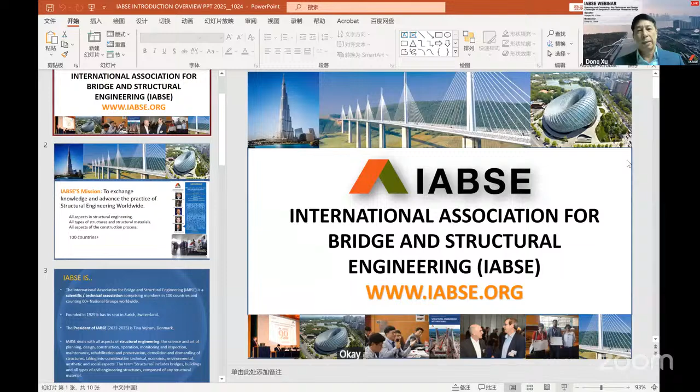The full name of IABSE is International Association for Bridge and Structural Engineering. Its mission is to exchange knowledge and advance the practice of structural engineering worldwide. It has members over 100 countries, with national members and individual members.

IABSE is a scientific technical association comprising members in 100 countries and more than 60 national groups worldwide. It was founded in 1929 and has its seat in Zurich, Switzerland.

The current president of IABSE is Tina Vejrum from Denmark, and the president elect is Harsha from India. IABSE deals with all aspects of structural engineering.

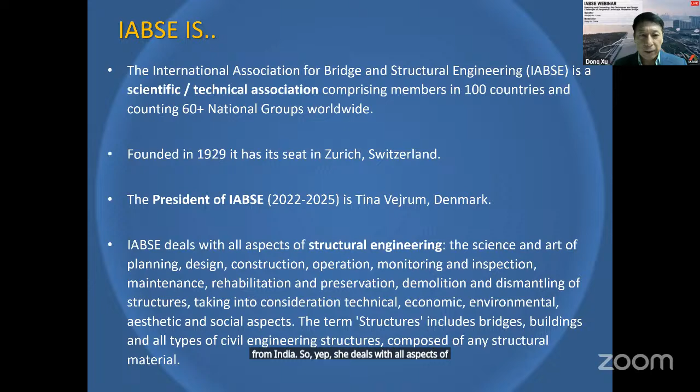The objective is to promote cooperation and understanding among all those concerned with structural engineering and related fields by worldwide exchange of knowledge and experience, to encourage awareness and responsibility of structural engineers towards societal needs, to encourage actions necessary for progress in structural engineering, and to improve and foster cooperation between organizations having similar objectives. For this purpose, the association organizes conferences.

It has two conferences every year: a congress in autumn and a symposium in spring. It publishes the high quality journal SEI, the Structural Engineering International, and books reflecting the work of technical groups we call SEDs. It creates technical groups as needed by new technology progress, offers opportunities to join activities within national groups, offers a program for young engineers, and presents annual awards.

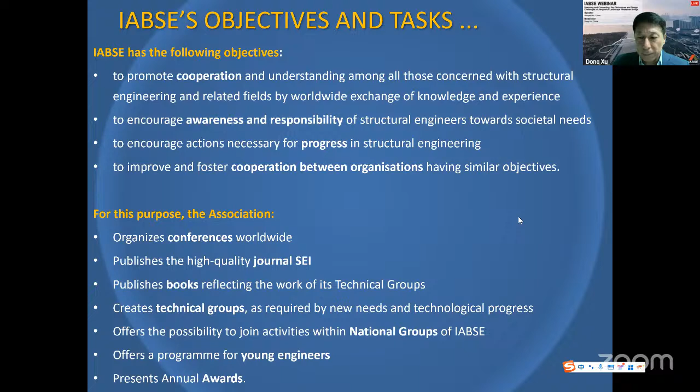This is an example of activities. This year's Congress was in Ghent, Belgium, and next year's symposium will be in Copenhagen, Denmark.

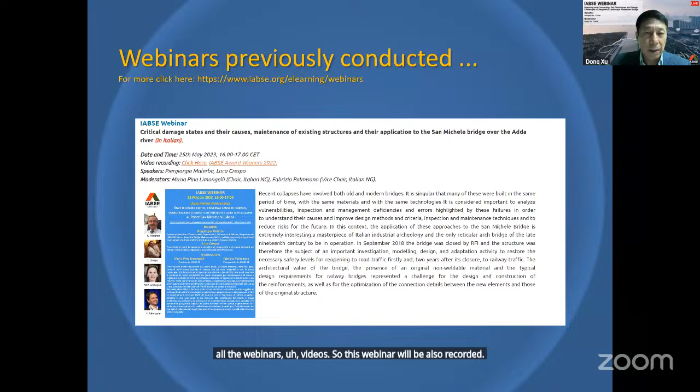IABSE has awards: the IABSE People and Paper Awards, and awards for projects and technology. Today's webinar bridge is a finalist of pedestrian and cycle bridges this year. The winner will be announced next month in Zurich, Switzerland.

My presentation includes four parts. The first is project overview, including the bridge location, architecture concept, and some information about the challenges we faced designing this bridge.

The second part is the bridge structure scheme, including mechanism and composition and some parameter comparisons we did.

The third part is specialized design, including the wind tunnel test, pedestrian comfort analysis and test, seismic design, and some detailed design. The last part is about the construction process and some site photos.

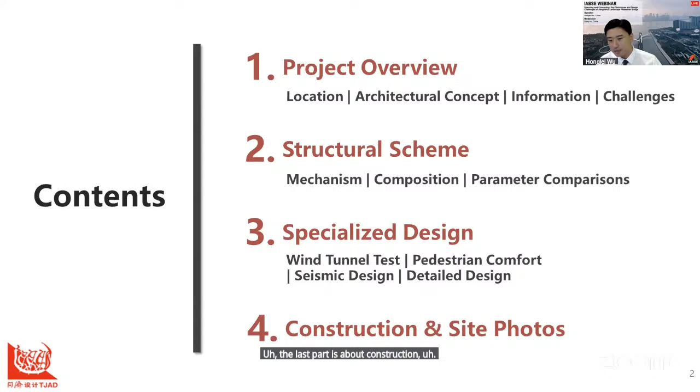This is a site picture of Jianghehui Bridge. This bridge is located in Hangzhou, China. The architecture design of this bridge is by Zaha Hadid Architects, and the structure concept design is by Arup. We are the Tongji Architecture Design Institute, the local design institute department, and we carried out all of this bridge's design and construction review.

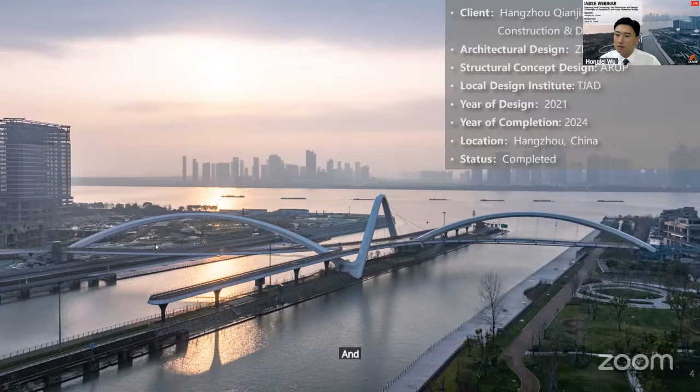This bridge was designed in 2021 and finished in 2024. You can see this picture. Along this bridge there is a very large river, the Qianjiang River, about 600 meters wide. And this small canal is the Jinghang Grand Canal, very famous in Chinese history.

But now this Grand Canal is on the World Heritage list. This bridge is in a very unique and important position, so it has some meaning about the history between modern and old times. Also, this canal still has an important function for busy shipping today.

Also in Hangzhou, this bridge will become a landmark. In the old time, Hangzhou was known for West Lake. Now, it will transfer to the Qianjiang New Era. So this bridge is a very important landmark in this place.

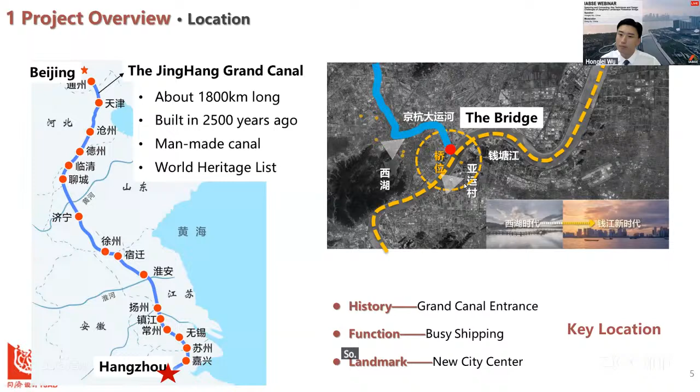The architecture group Zaha is a very talented design group. They designed a very important aim for this bridge, calling it 'threading the needle,' which means seamless connection to the city. It has two meanings, including seamless history, meaning the bridge connects the old time and the modern time.

Also, this bridge has a very important function called the seamless city. This bridge spans three disconnected shores and connects to five urban districts, giving it a very important function to this place.

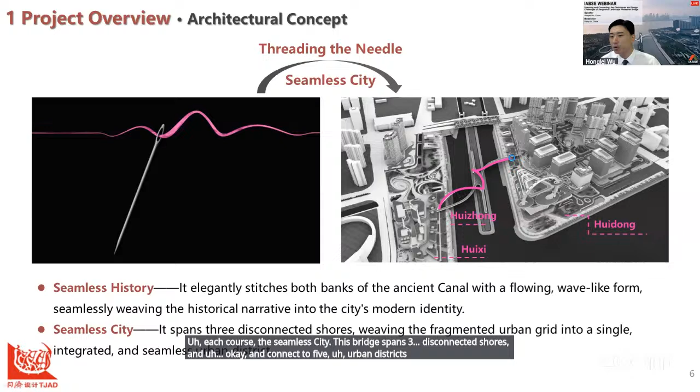Because the architecture is from the Zaha design group, they like to use a very unique and curved shape geometry in this bridge. So the bridge geometry is also very complicated.

It has three bridges continuous with each other, including the West Arch, which is 145 meters long, the Middle Arch, which is 79 meters, and the Eastern Arch, which is 156 meters long.

All the decks connect with each bridge. You can see from the west to the east, the deck connects to each arch. So the deck helps to bear conflicting forces.

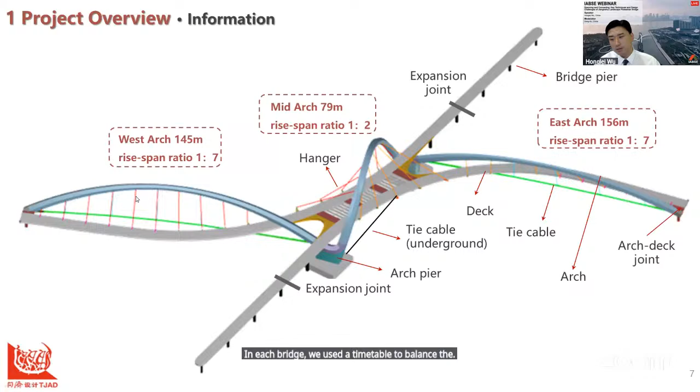Also, because this bridge is near the shore, the foundation is not very good. So we had to design this bridge using a self-balance system. At each bridge, we used a tie cable to balance the arch thrust.

When we designed this bridge we faced many challenges at the system level, such as the arch. This arch is inclined, and the three arches are continuous but not in one plane. The support is also complicated, an asymmetric boundary, and because the bridge height is strictly limited, this bridge has a small rise-to-span ratio.

The deck is very wide, up to 6 meters, with many functions including walking, cycling, and marathon use. Also, for a better side view, this deck uses single-side suspension.

Because of this complex geometry, the structure's components are also complex, including irregular earplates, twisted arch piers, and the arch-deck joint.

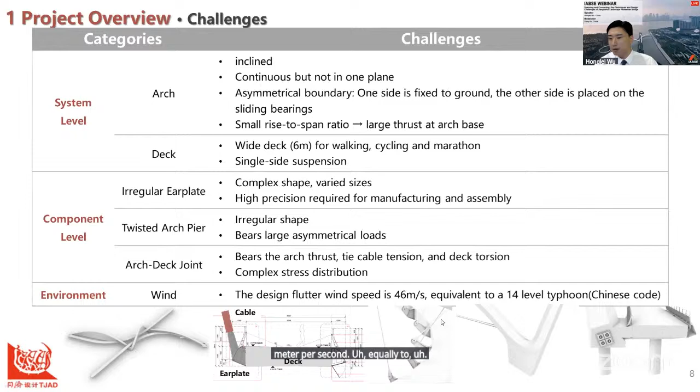This is some more detail about this bridge. You can see the three arches are continuous but not in one plane, so every two bridges create a very large unbalanced force in the arch pier.

Because the top of this bridge is limited, the rise-to-span ratio is small, so the side arch is a shallow arch, leading to a very large thrust. For the boundary, it's asymmetrical: one side is fixed to the ground, and the other side is placed on a sliding bearing. So we use this tie cable to balance the arched thrust.

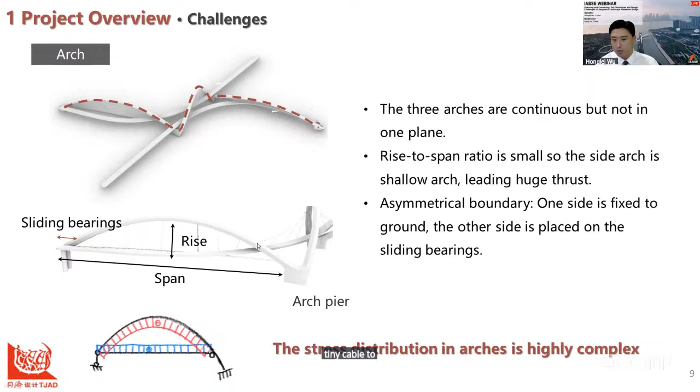This bridge deck is very special because it has many requirements, like marathon events and cycling use. So the width of this deck is up to 6 meters. Also, for a better side view, this deck is single-side suspension, so people in this place can see the Qianjiang River.

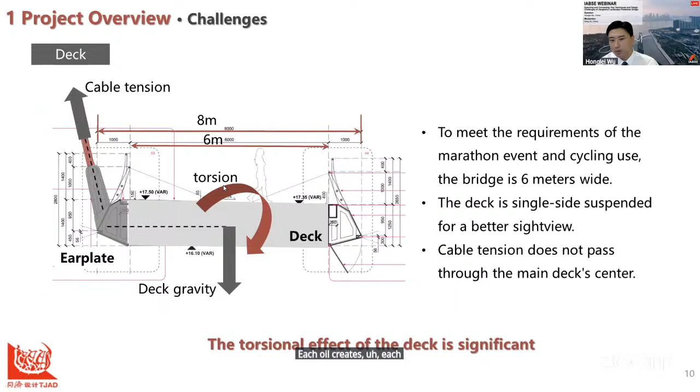Because this cable tension to these earplates does not pass through the deck center, under gravity it creates a very large torsion in the deck.

Also, because of the complex shape, every earplate is a different size, different angle, and has different forces. Also, the architecture has strict requests for manufacturing, so high-precision data is needed for these earplates. We provide this data to the manufacturers and construction group to make these earplates.

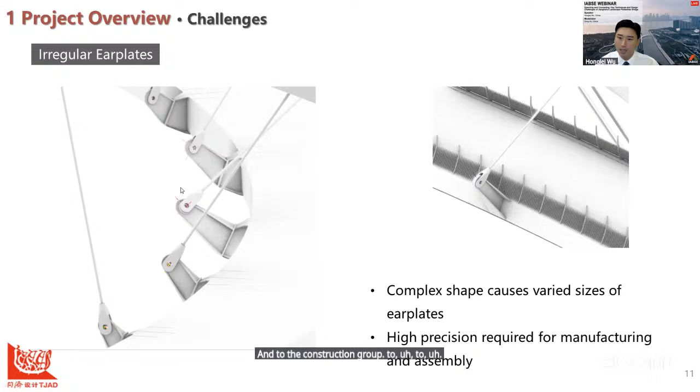This is a twisted arch pier. Each arch pier has to bear two arch thrusts and cable tension. Because the two arches are not in one plane, there is a very large torsion in the arch pier.

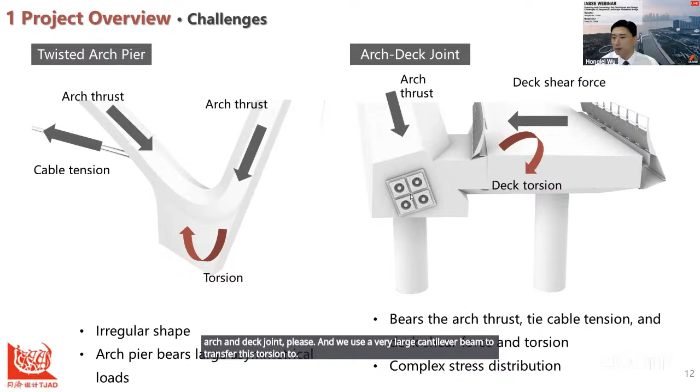At the same time, at the end of the bridge, at the arch-deck joint, the deck transfers a very large torsion to this joint. We use a very large cantilever beam to transfer this torsion to the supports.

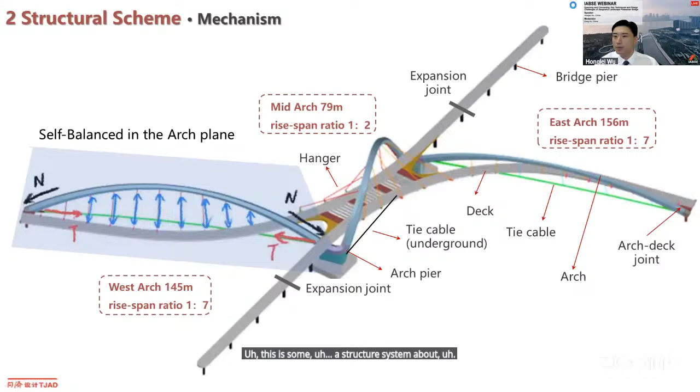This is some structure system about mechanisms. For example, we use one west arch, as you can see, under the gravity.

This arch is self-balanced in the arch plane. The gravity load will transfer from the deck by the hanger cable to the arch, and the arch will transfer to the big thrusts at the end, and we use tie cable to balance this thrust from the arch. So the foundation's force will be largely reduced. Horizontal force is only just a vertical load for the foundation.

And we do many comparisons and many calculations about the arch inclined angle, arch section, and weight to make sure the combined force of the arch weight, self-gravity, and the suspension force from the deck align in the arch plane.

So the arch, although this arch is inclined, the forces in the arch are mainly axial force, and because we have tie cable, we can balance this thrust. Therefore, all the force in the arch is in one plane.

For the deck, the vertical component of the hanger force will balance the deck weight gravity. But because this force will not go through the deck center, there will be a very large torsion. For the horizontal components, the force will be balanced by the shear and axial force in the deck and transfers to the end of this bridge, and on this side it will transfer to the other bridge, and go into the third arch end for this deck force.

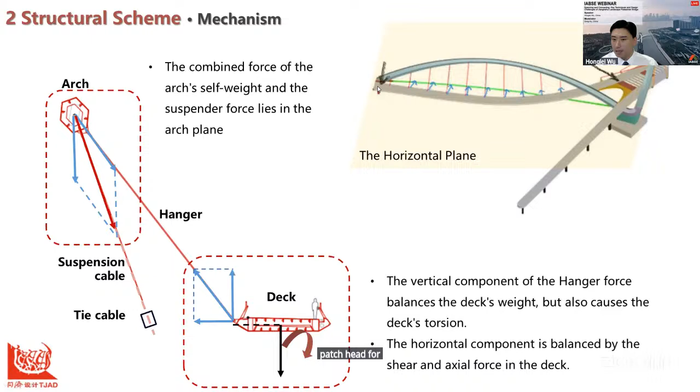This is some detailed design about the members of this bridge. You can see for the arch member at the foot, the arch member will be up to 4.3 meters high and 4 meters wide. We use a hexagonal shaped member, and at the top of the arch the member will be smaller, about 2.8 meters high and 2.6 meters wide.

The arch member is very complex because we have to anchor two cables. This large one is the hanger cable to support and hang the deck, and the small cable is the suspension cable we use to hang the tie cable.

The thickness of this arch member is about 40 millimeters at the foot and 32 millimeters at the arch top. The material we use is steel, about Q420qD.

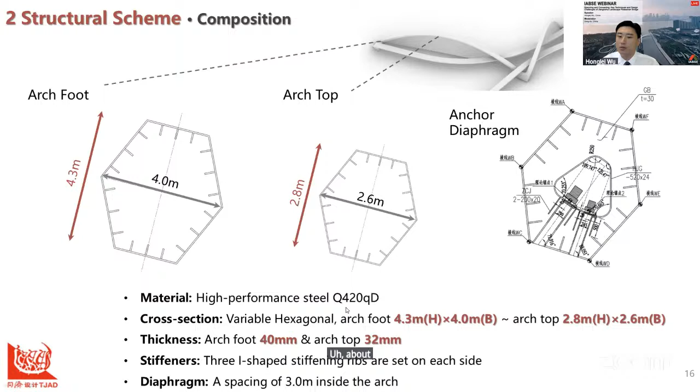In this bridge we have three types of cables. The first one we call the tie cables, which are at the back of this bridge, used for balancing the arch thrust. Each arch has four tie cables. Each tie cable's diameter is 140 millimeters. There is about 7,000 kilonewton force in each tie cable.

The second cable we call the suspension cable. This one is for hanging the tie cable. Its diameter is small, only 60 millimeters. It will have about 1,200 kilonewton in each suspension cable.

The third type of cable we call hanger. It's used for hanging the deck, and there are two diameters: the small one is 80 millimeters, the large one is 100 millimeters, and the force is about 3,000 kilonewton.

For the deck material, we also use high-performance steel Q420, and the cross-section of the deck is about 6 meters wide and 1.37 meters high at the end, and at the top is 1.29 meters. The thickness of this deck varies from 16 millimeters to 24 millimeters.

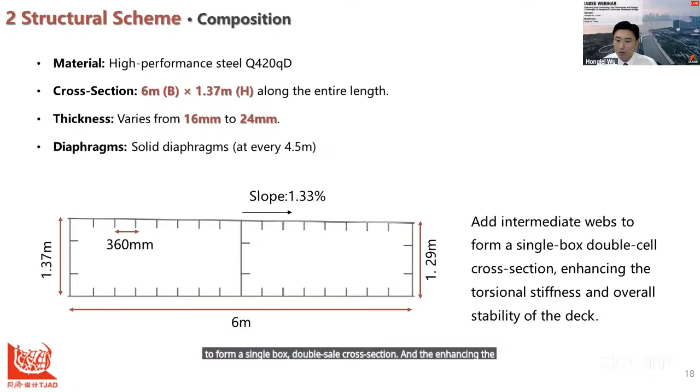We add intermediate webs to form a single box double cell cross section, enhancing the torsional stiffness and overall stability of the deck.

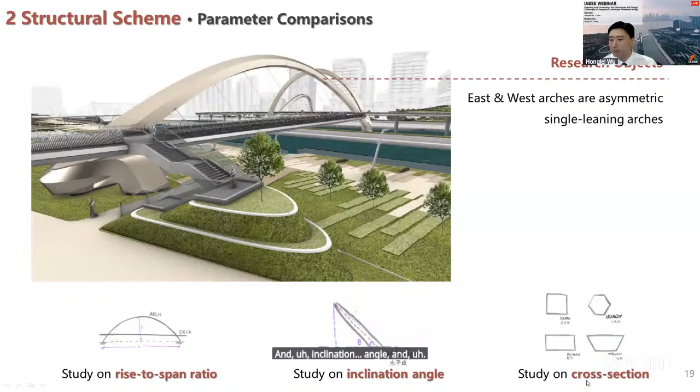And we compare some parameters between these five bridges. From the arch span, we can see Jianghehui Bridge is very long, up to 150 meters, and the deck width is also very big, only less than the Gateshead Bridge.

For the rise-to-span ratio, the other four bridges are about 1 to 3, but in our bridge it's up to 1 to 7, which means we will have a very large arch thrust. We also compare the inclination angle, because our bridge is large and heavy, so the inclination angle can't be very small. So our bridge is more strict than other bridges.

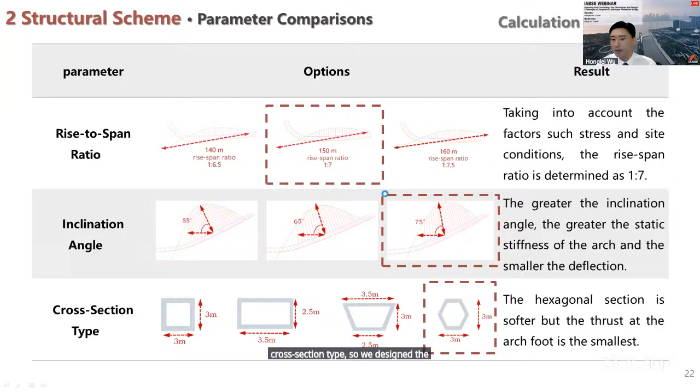For the cross-section type, because the architecture wants our bridge to be unique, we use a hexagonal section, which is a six-sided section. We compare different parameters like span, incline angle, and cross section type. So we design the final parameters for this bridge.

Because this footbridge is large and near the big river, the wind load is strong, so we did some wind tunnel tests in Tongji University, comparing different wind situations such as uniform flow field and turbulent flow field. This model is 1 to 49 full bridge scale.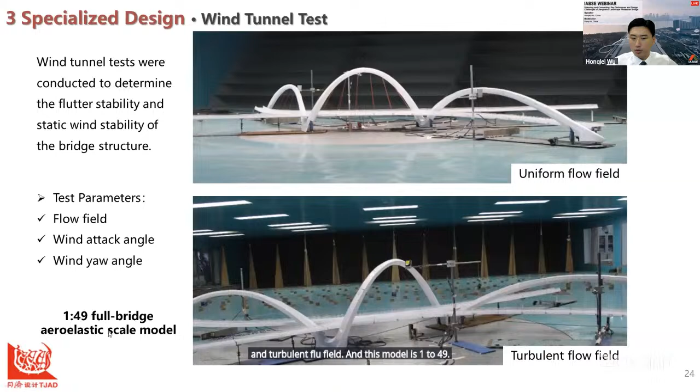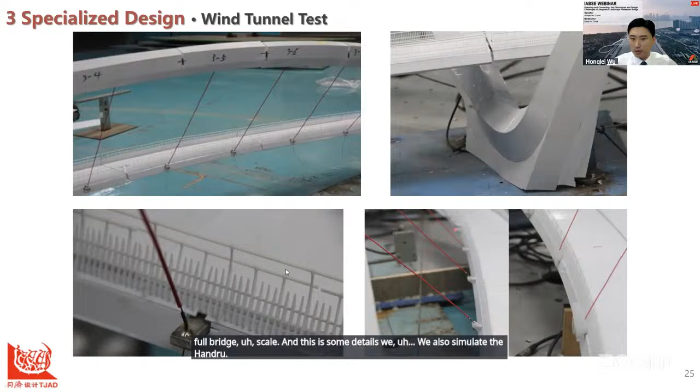According to the wind tunnel test, for our bridge, the critical flutter wind speed under all test conditions in both turbulent and uniform flow fields was greater than 77 meters per second, which is about level 17 typhoon. In our code, we just have to satisfy level 14 typhoon, which is about 46 meters per second.

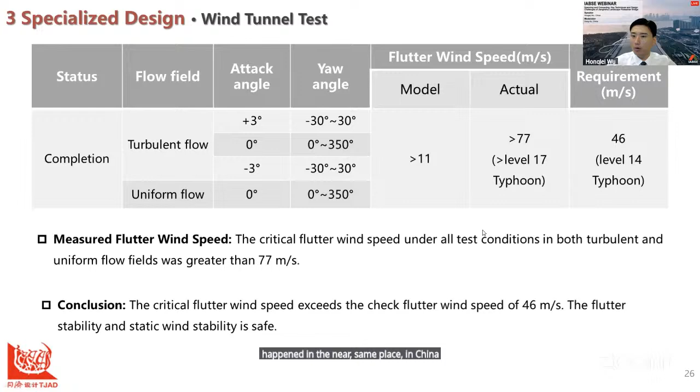But as you know, recently many larger typhoons happened near the same place in China. So we have to make our bridge stronger.

Regarding the comfort of this bridge, according to a Germany standard, there are mainly two sensitive frequencies about vertical vibration. The smaller one is 1.25 hertz.

We calculated our bridge. There is an 11th mode shape, and the vibration of the west bridge, west arch and deck has a frequency of 1.5 hertz.

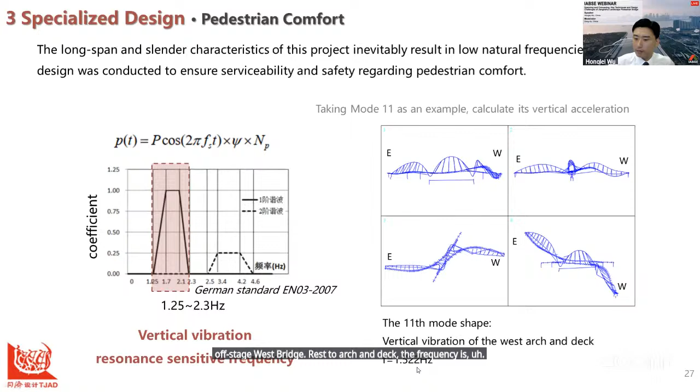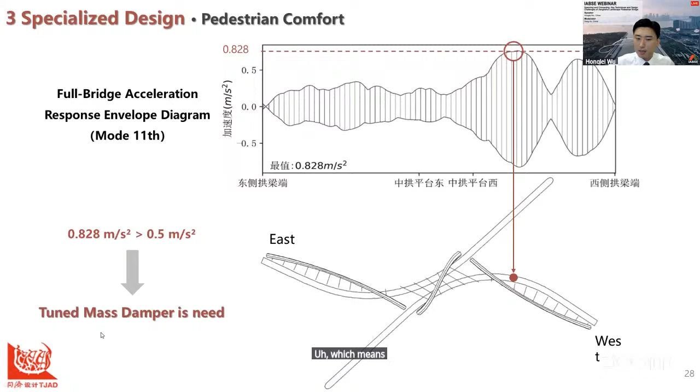So we calculated the acceleration response of this model, and we can see the vertical acceleration exceeds the code limit, which means a tuned mass damper is needed in this bridge.

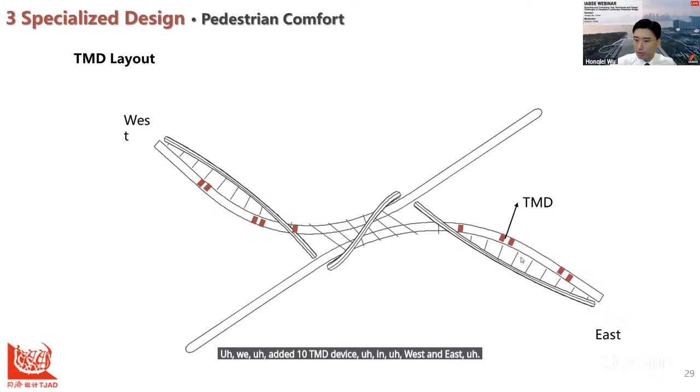We added 10 TMD devices in the west and east bridge to reduce the vibration. After putting the TMD devices in this bridge, the acceleration decreased by up to 1 to 10 compared to before.

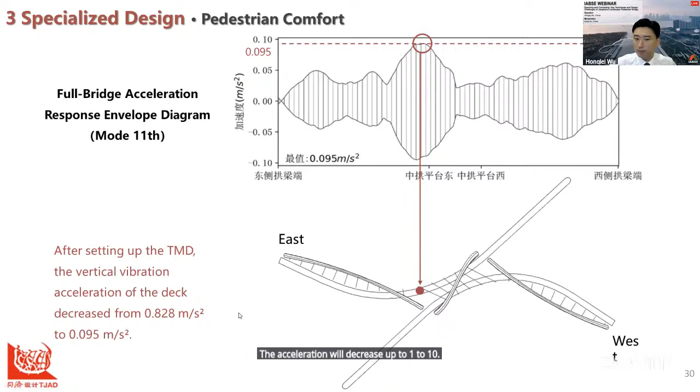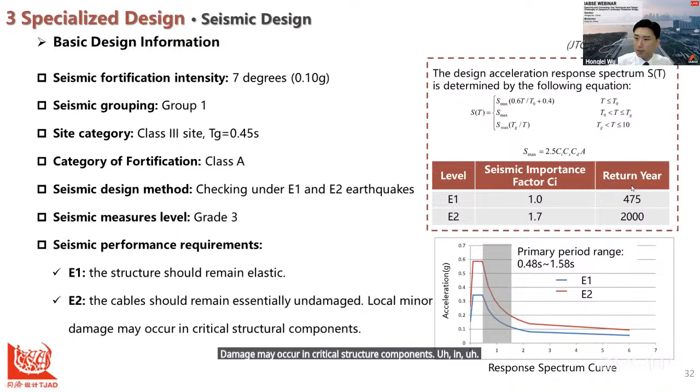For the seismic design in Chinese code, we have to face two seismic requirements: E1 level, which means the structure should remain elastic under a 475-year return period earthquake action; and E2 level, in which the cables should remain essentially undamaged, with local minor damage allowed in critical structure components under a 2000-year return period earthquake action.

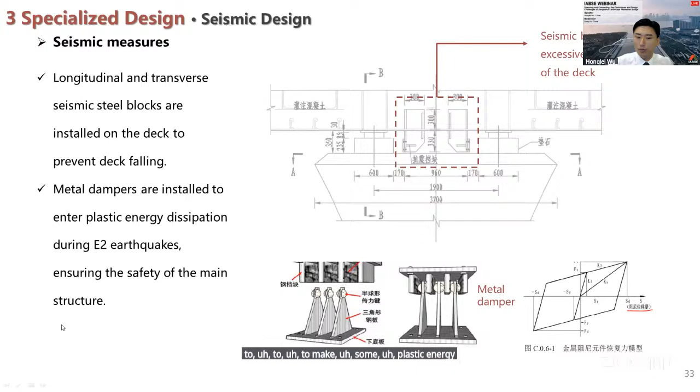We put some steel blocks along the longitudinal and transverse directions of this bridge to prevent the deck from falling. We also put some metal dampers in the bridge to achieve plastic energy dissipation during E2 earthquakes.

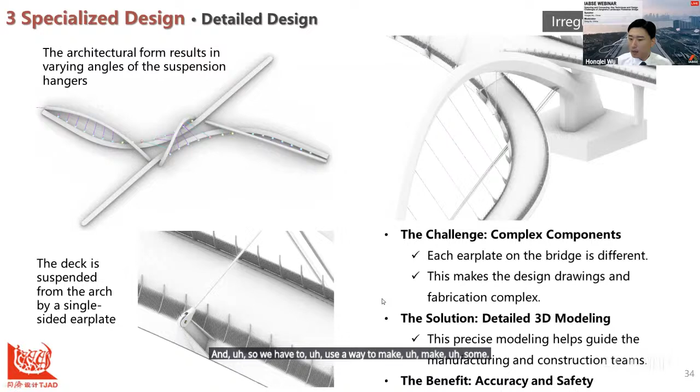For the ear plates, as I said before, the geometry is very complicated, so we had to find a way to make accurate and safe ear plates. We used Rhino and Grasshopper software to confirm each ear plate.

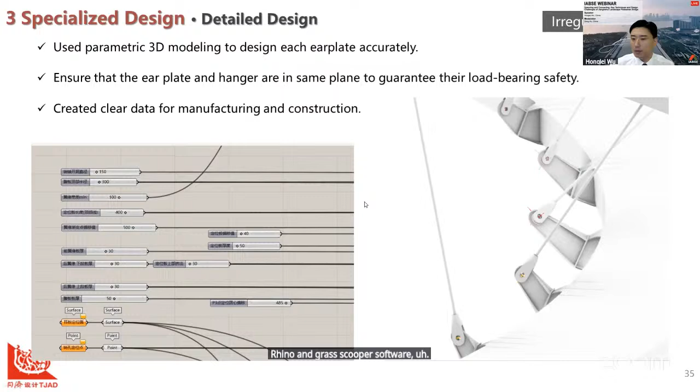There are three types of ear plates. The simplest one, the small ear plates, has only axial tension force. For some tall ear plates, there is tension and bending, so we use continuous tension flange in these planes, while the compression flange is welded.

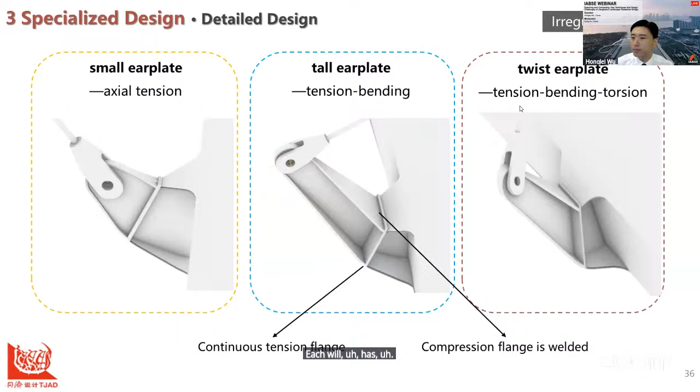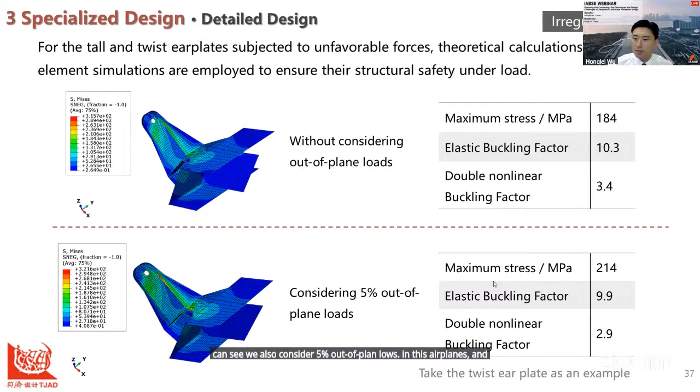The complex one we call twisted ear plates. It has tension, bending, and torsion. We calculated all of the ear plates, considering 5% out-of-plane loads, and the maximum stress is about 200 MPa.

Because the architectural form gives the arch pier section spatially continuous and twisted ear plate pairings, the force in this arch pier is very complicated, including arch compression and cable tension, which creates very large torsion in the arch pier.

So we set many internal diaphragms and stiffeners in the arch piers to ensure the safety of the arch wall panels under combined stress conditions, and on the other hand, to ensure the reliable transmission of the tie tension.

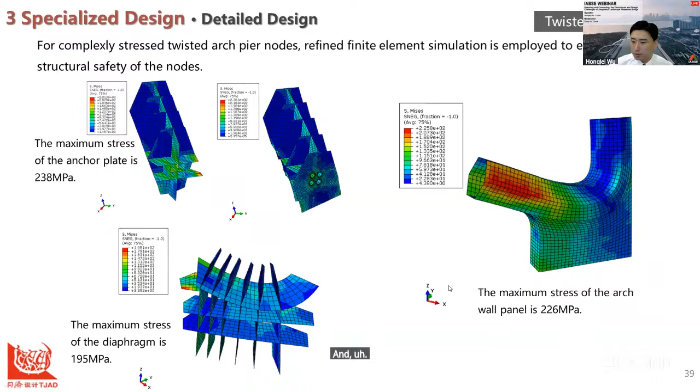We also calculated the different load conditions for this structure, and the steel stress is about 226 MPa. For the arch-deck joint, the arch foot is also a very critical part of the entire bridge, requiring coordinated work between the arch force and the deck.

Because the deck torsion will be transferred to the arch member and to the support, we considered how to manage this transfer carefully.

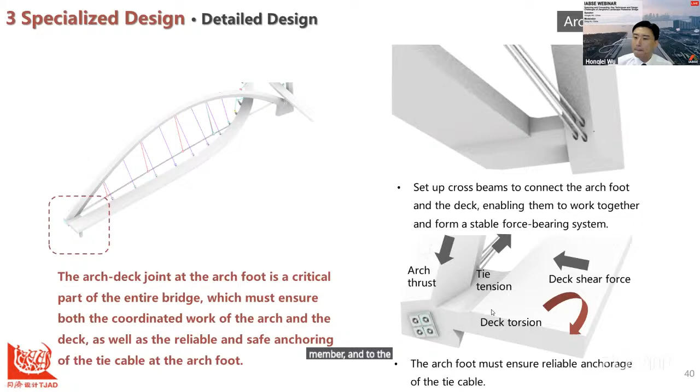We also used many anchor diaphragms in the arch member to transfer the tie cable's force, and we used three cross beams to transfer the deck torsion force to the arch.

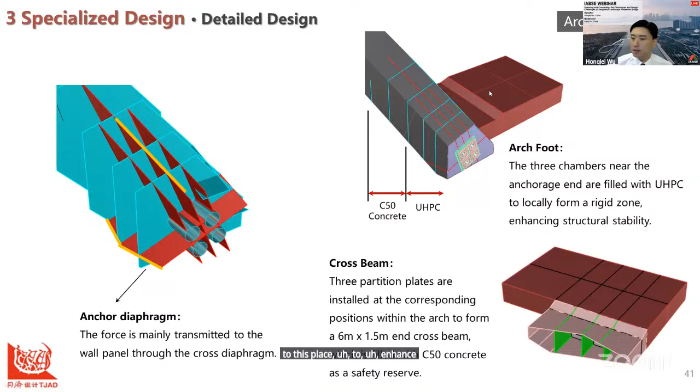We used UHPC material in this location to enhance structural stability. This is some of the calculation work.

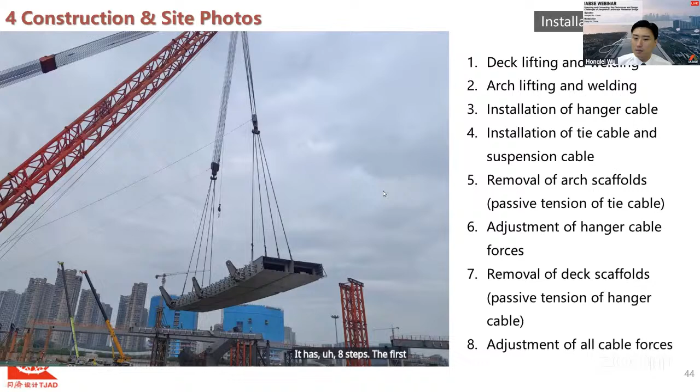The last part is construction and site photos. This is the bridge installation process. It has 8 steps. The first one is deck lifting and welding. This is the deck.

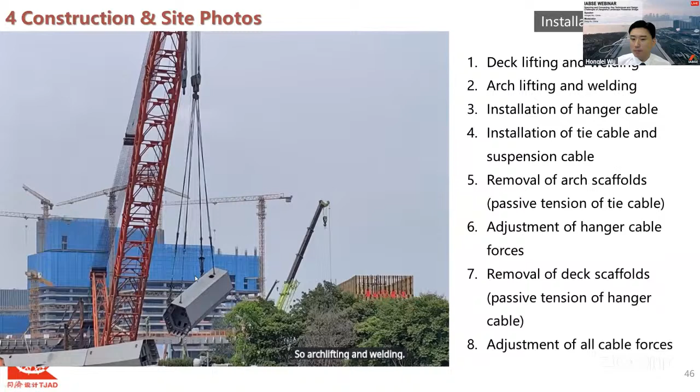The second process is the arch lifting and welding, and this is the arch being lifted.

The third step is to install the hanger cables between the arch and the deck, and the fourth is to install the tie cable and the suspension cable of each arch.

And next, we removed the arch scaffolds. At this place, this tie cable will have passive tension.

Next, adjustment of the hanger cable. We make some force in this hanger cable, and next we remove the deck scaffold.

At this time, we will create some more passive tension in the hanger cable and in tie cables. At last, we adjust all the cable force, mainly the hanger cable, to make each cable's force more even.

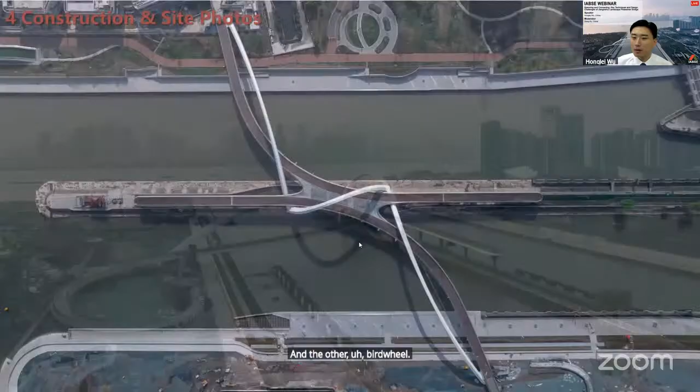This is the finished bridge, and the other bird view, and from the top view, and from the human view. Okay, that's all for my presentation. Thank you.

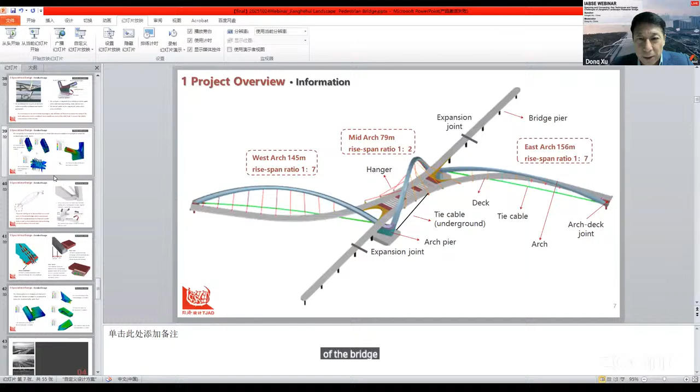What kind of foundation? Piles? Yes, yes, this foundation is very typical. It's just the pile foundation, because most of the torsion and shear force is transferred by the raft, not transferred by the piles. Only the vertical force is transferred by the pile foundation.

So there are no inclined piles, only vertical piles? Yes, yes, yes. Okay, okay.

So the suspension cable can take the thrust of the east and west arches, and the underground tie can take the thrust of the mid arch. Am I right? Yes, okay. So you don't need any inclined piles to take the horizontal forces?

Yes, because the canal government administration has very strict, very high requirements. They don't allow us to make any pile inclined to go into the canal. So we were only allowed to transfer the vertical force in the foundation.

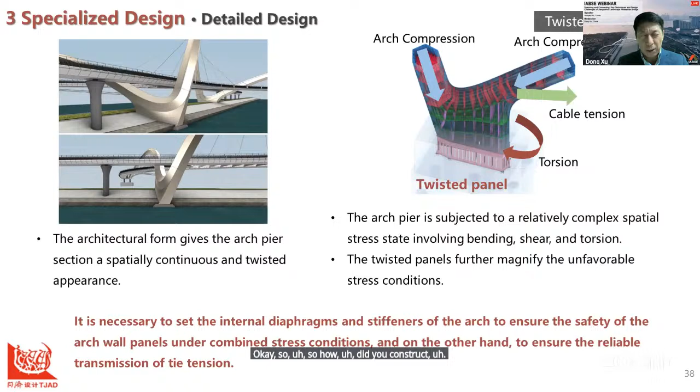Okay, okay. So how did you construct this on site? How did you build the horizontal ties? That means the underground ties for the mid arch.

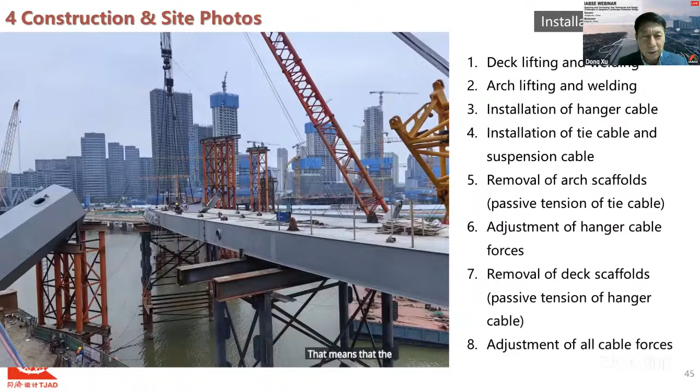In the middle arch, actually they don't have many horizontal forces, because we put the tie cable on the ground to balance the horizontal force. And for each side large arch, we used tie cables. So there were not many large horizontal forces in these two bridge spans.

Okay. So, do you have any lighting design for this bridge? Yes, we have, but the picture is not very beautiful, so I didn't put it in. Do you have any materials to show us?

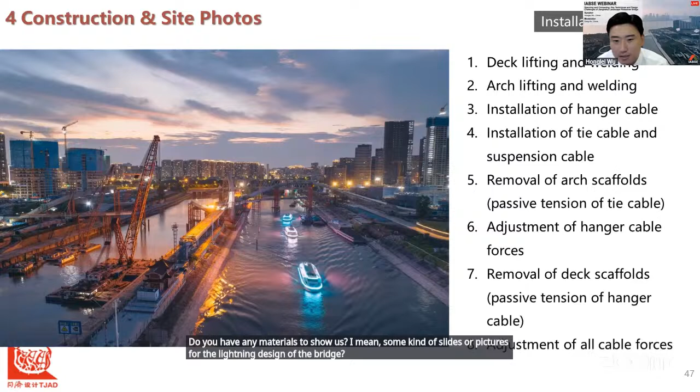Sorry, I mean some kind of slides or pictures for the lighting design of the bridge in the evening. Yes, I don't have the picture, so sorry. Okay.

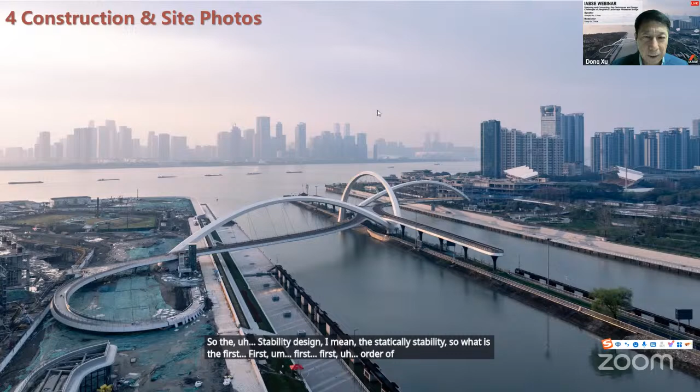Let's check if we have any questions from the audience. So, the stability design—I mean the static stability—what is the first order buckling mode for the bridge? Okay, the first buckling mode of this bridge is out-of-plane deformation.

Okay, yes. The mid, the large arch, the west arch—yes, the west arch. The first buckling mode is out-of-plane deformation. Okay.

So what is the cost of the bridge? About... sorry, it's about 880 million RMB. Okay.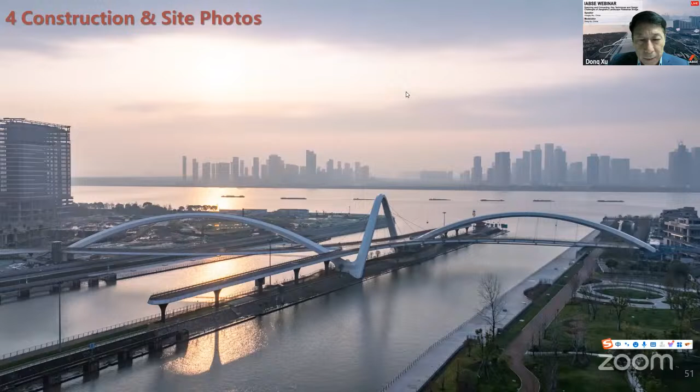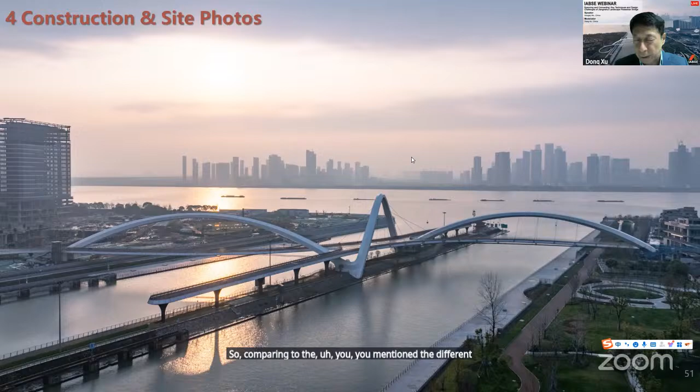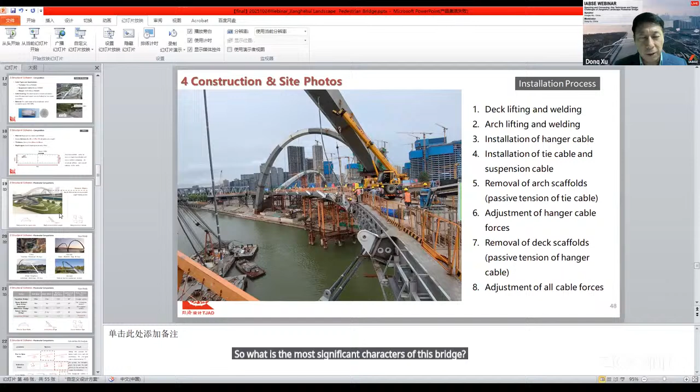So comparing to the different bridges you mentioned in UK, Germany, and other cities of China, what is the most significant character of this bridge? Let us know what you think. What is the most significant design character of this bridge? What can make this bridge unique?

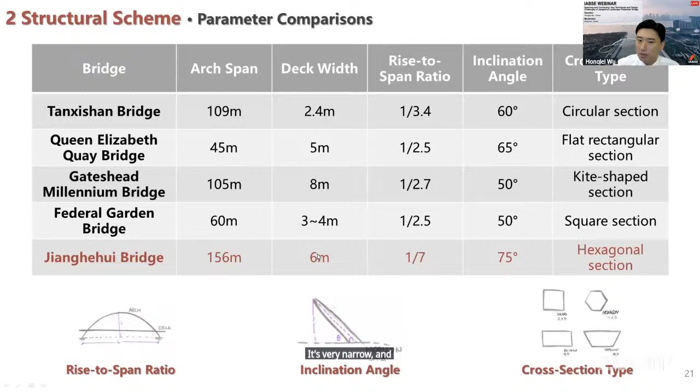I think there are three parts that make our bridge very special. The first one is the geometry of the bridge, which is very typical and has very good geometry. It doesn't have a reasonably large rise-to-span ratio like other bridges; our rise-to-span ratio is very narrow, which means we have a very large arch force.

The second is, also like Tanxishan Bridge which is in the mountains, it has very good foundation conditions, so the bridge force can directly transfer to the foundation. Also like the Gateshead bridge, it has a very large span, wide bridge, and a strong foundation. But in our bridge, we are not allowed to transfer the horizontal force into the foundation.

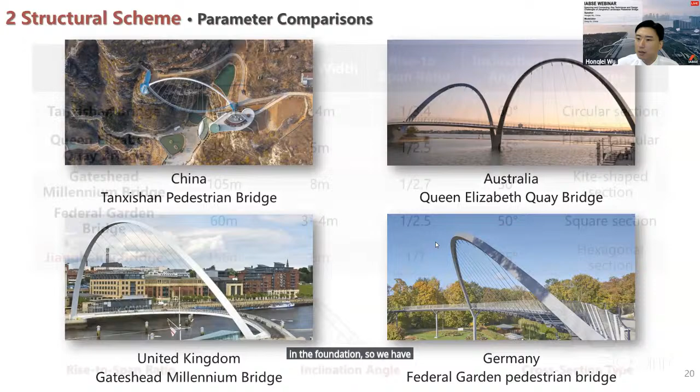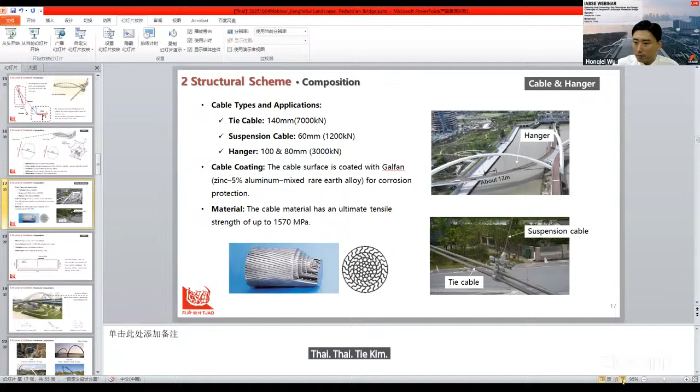So we have to use a stronger tie cable for our bridge, and this tie cable is above the river, so we have to use a suspension cable. This means in our bridge, the horizontal force resolution is very unique in this project.

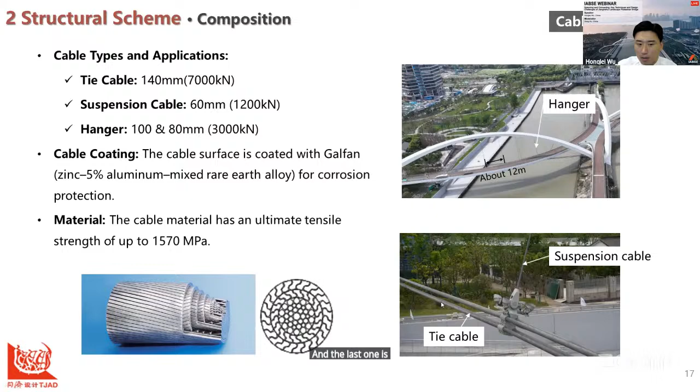It has many types of cables, and the last point is our construction process is very complicated. Because this deck goes through, it's under the bridge, so we have to make this deck first, and there are also many cables. Also, just like the tie cable, it carries a very large force, so we can't use active methods for this tie cable.

So we have to carefully manage the construction process to create passive tension in the tie cable. You can see there are about three or four processes to confirm the final tie cable force in this bridge.

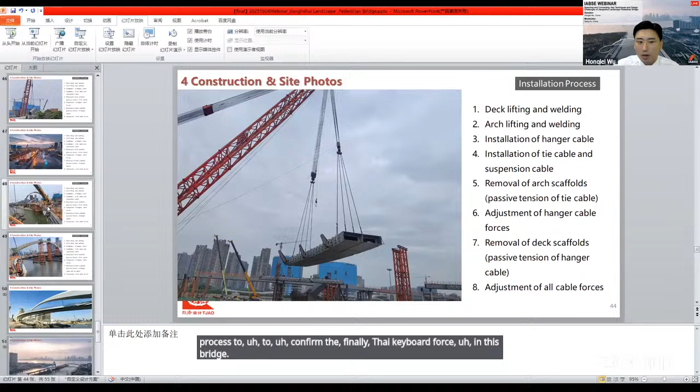Also, because we are in a very important place, the Grand Canal, you can see in this picture the ship traffic is very busy from day to night, so we have to carefully use as few scaffolds as possible. This means that since this arched bridge connects, every member of this bridge is very long.

It needs a strong, large device, this machine, to lift this bridge arch member onto the scaffold. And because the geometry is also complex, it's very hard for the people to weld this bridge.

My last question: because you mentioned the cable force you call passive, that means it is reacted from the weight of the arch. You didn't tension the suspension, the tie suspension, am I right? You didn't tension the tie—it only takes the reactive force, which you call passive force from the arch weight.

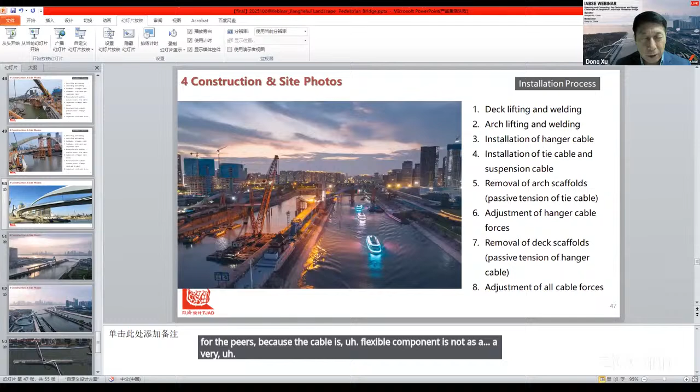My question is that you have some horizontal force left for the piers, because the cable is a flexible component, not a very solid tie, so it has some elongation because of the tensioning force. So the pier will take the thrust force. You mentioned there are no inclined piles, only vertical piles, so what about the horizontal forces left for the piers?

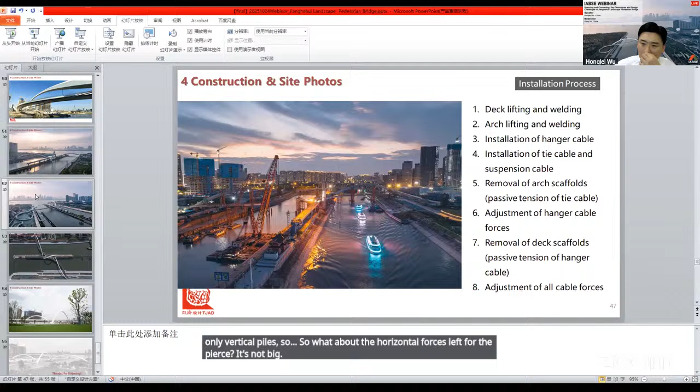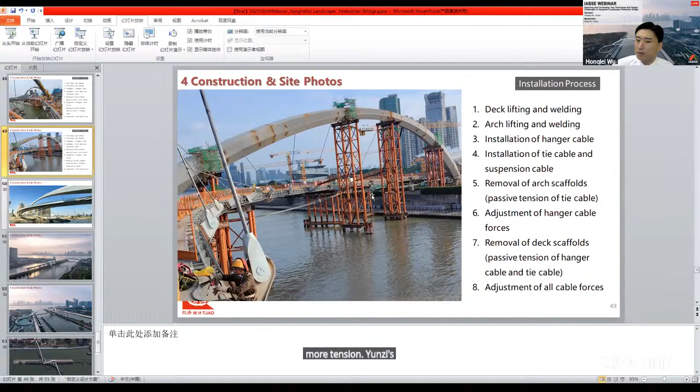Yes, it's true, it's not big. For this arch pier, there is some horizontal force in each pier, but it's small, not very large, because at the end phase we also adjust all the cable forces, which means for this tie cable, at last we give it more tension to reduce the horizontal force in the arch pier.